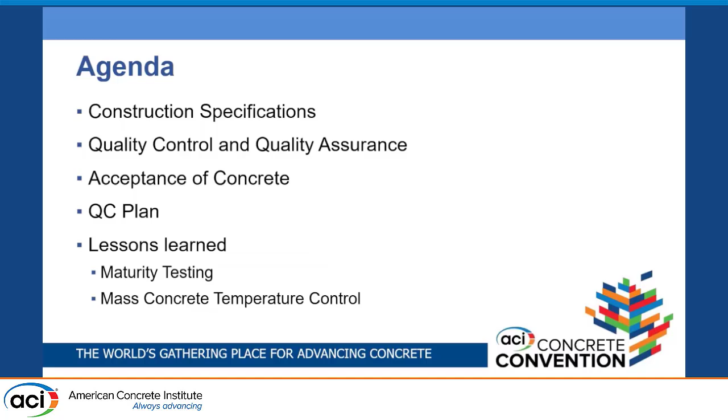Part of the subjects or issues are going to be construction specifications, quality control, quality assurance, acceptance of concrete, QC plans, and lessons learned on maturity testing and mass concrete temperature control.

Contract documents include the plans, technical specifications, the legal part, and those are made to ensure that the quality of the workmanship, control of the tolerance, and materials necessary to carry out and finish the work comply as specified and will be performed according to the designer's intention.

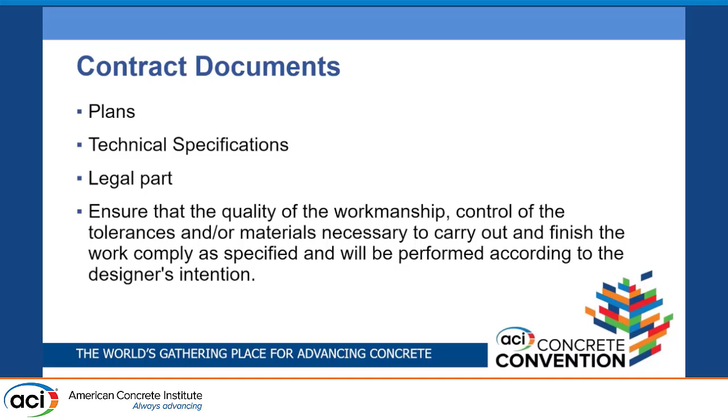Construction specifications should establish the acceptance parameters. They should be easy to understand. Something that Ramon always advised us is that if there is a specification that is not clear enough, just call out, make the call, make it clear before doing any activity.

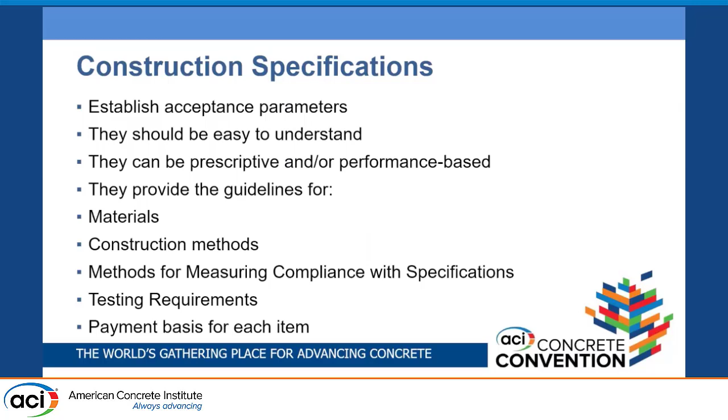They can be prescriptive or performance-based. They provide the guidelines for the materials that we're going to be using, construction methods, methods for measuring the compliance with the specifications, testing requirements, and finally, the payment for each of the items.

Quality and profit go hand-to-hand. The contractor may pay for the cost of a quality control system to provide an appropriate level of quality, or the contractor may pay for the lack of control through costs associated with poor quality in construction, including more repairs, patching unacceptable areas, removal and replacement of concrete works, time impact on the construction schedules, and high litigation costs.

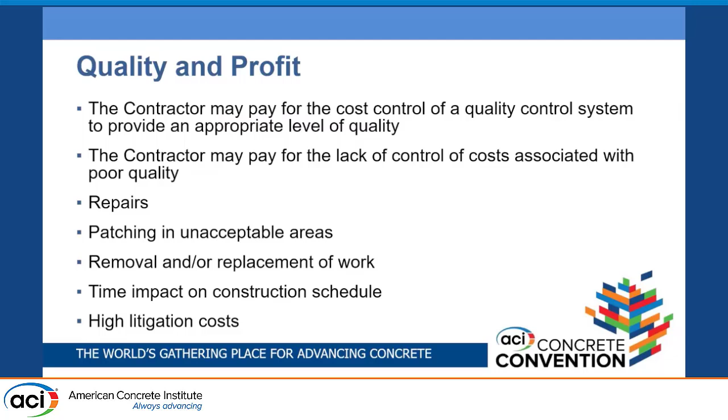This is something that I always use in my presentations, that we need to think quality. And quality is not only part of the quality control department of the contractor or the concrete producer. Quality control is a matter of everybody in the team of the construction: designer, inspectors, quality assurance, suppliers, producers, everybody. We should do it right the first time. We don't always get a second chance.

Pre-construction meetings with QC and QA teams should have representatives from QC and QA before construction begins. It's where we review all the project requirements, review the action or suspension limits for any activity, identify and clarify any mismatches or articles that are ambiguous on the drawing plans and specifications, and review the handling of test results that are non-compliant, as well as the chain of command for decision making.

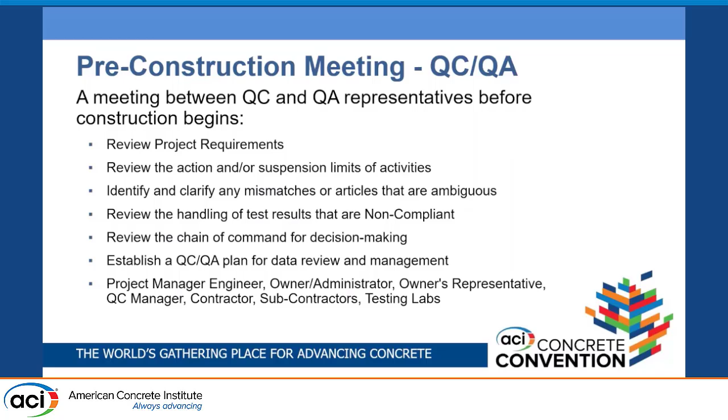Sometimes you can have a report that is not favorable for the contractor, but if there is no decision maker, then you can delay the project just because there was nobody to take the decision. Establish the QC and QA plan for data review and management of the project, and it should involve all the parties: the project manager, the engineers, the owner administrator, the owner's representative, QC managers, contractors, subcontractors, testing labs, suppliers, etc.

The cost of poor quality, what it means for the owner: loss of income, operational delays, reduction in the useful life of the structure. In 2018, I started working with a contractor at the airport in San Juan, Puerto Rico.

That's the taxi lane that connects both runways, doing the concrete pavement for the taxi lane November. At the time that I entered as a QC manager in that project, the contractor was very delayed with a lot of non-compliance because of the soil compaction, the P209, the subgrade, the P209, the CTB. We entered to try to put everything together, try to start again, and do it the right way.

What does poor quality mean for the contractor? Corrective actions that are sometimes very expensive, partial payments. I don't know if there is any contractor here today, but everybody wants to get paid 100%, not with discounts. Cost of claims, and at the end, liquidated damages.

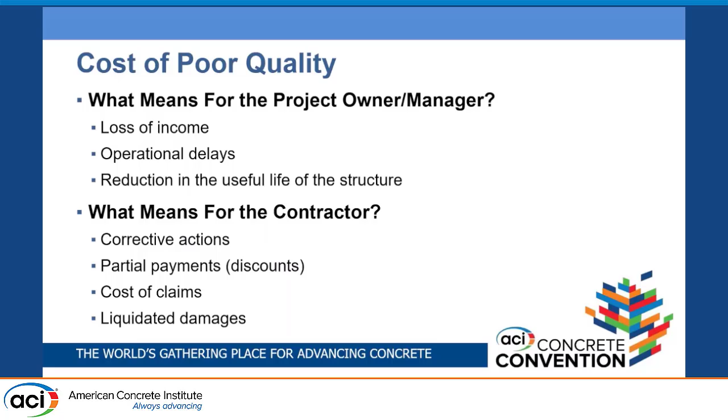In that project that I was on from 2018 through 2020, we ended up paying $1.5 million just in liquidated damages. And that was just because I was there. So I wasn't the owner of those liquidated damages, but I saw the certification, the final certification of those liquidated damages. I was there, so it is true.

What we should know before we place concrete: we should know tolerances, and we have those guides in ACI 117, where there are installation instructions for the reinforcing steel, the sizes, the position, quantity, according to shop drawings. Make quality control and quality assurance of those shop drawings so they are clear for everybody to work with.

What's going to be the cover for the concrete and the formwork design, the distance between the face of the exposed surface and the soil and the forms, depending on the structure exposure. What are going to be the soil conditions, the compaction, moisture barriers, etc.

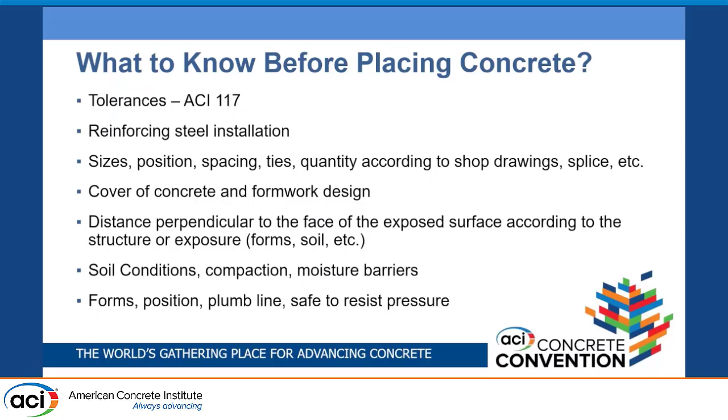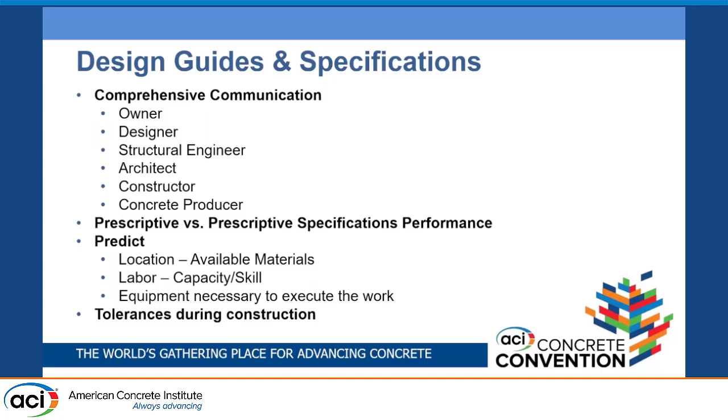On the guides for designing and specification, there should be comprehensive communication. Sometimes we lack communication. I think one of the things that we can have learned from Ramon is that we need to be very clear when we communicate, and we need to communicate with the whole team between owner, designer, structural engineer, architect, constructor, concrete producer.

Part of the concrete specifications, and this is very general, we can have guides from ACI 318, 301, 305, 311, ASTM C94, where in the specification we should have the compressive strength requirements, slump, workability that can be easy to adjust, easy to consolidate, and temperature.

In our case in Puerto Rico, we are classified as hot weather concrete. So the hydration of the cement and the condition of the temperatures and the admixtures that we use to delay the hydration, those retarders, are very, very important. Density or unit weight of the concrete, so we know we are inside the required yield. Air content for durability and workability, and the water-cement or water-cementitious ratios.

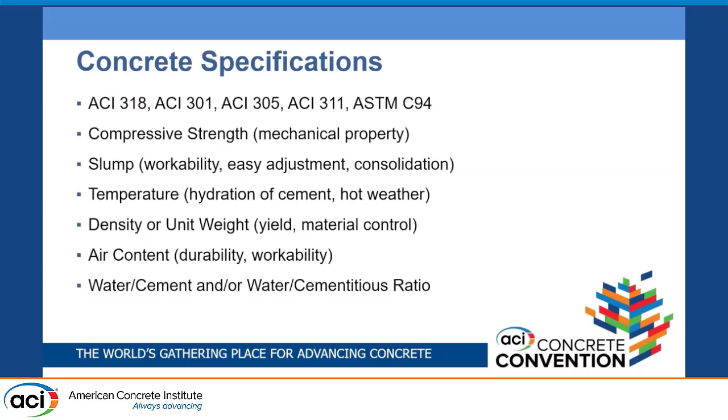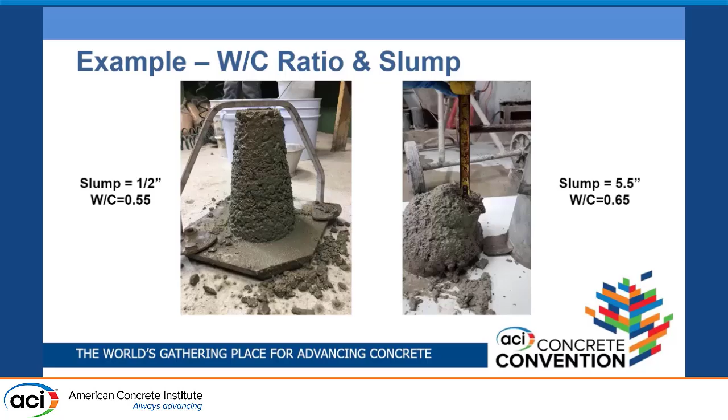We need to know what water-cement ratio we need, what kind of slump we have. Because sometimes we have specifications or drawing plans that request 3 inches of slump for a wall, but we know that in a wall that could be 6 inches thick, a concrete with a 3-inch slump is not going to be that easy to pour. So we need to manage that information, what kind of admixture we are going to use to make it more fluid to go inside the formwork.

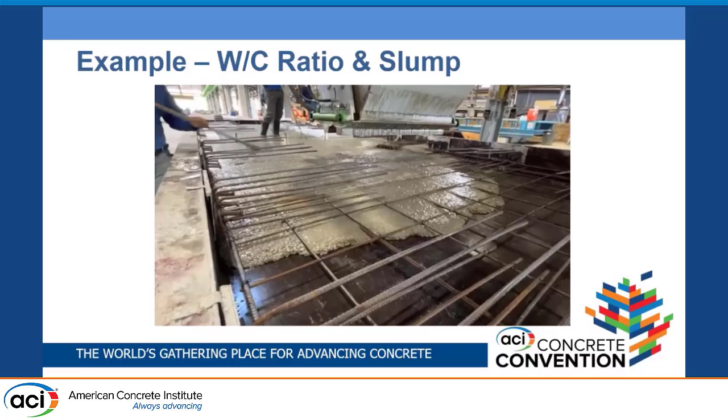This is a very good example of when you need more fluid concrete, but doing it, as Julissa said, not using water, using the right admixtures to make a better fluid concrete.

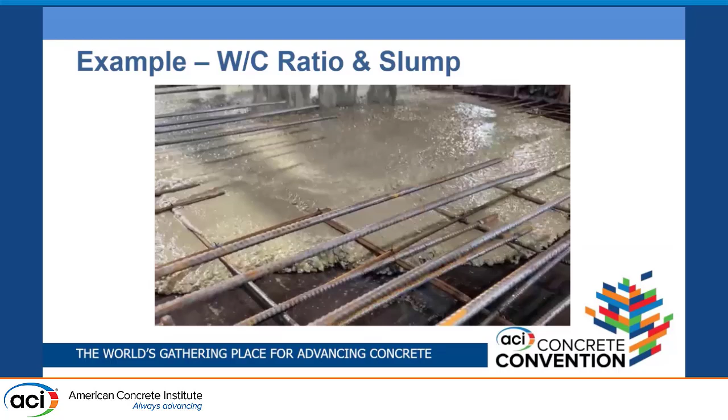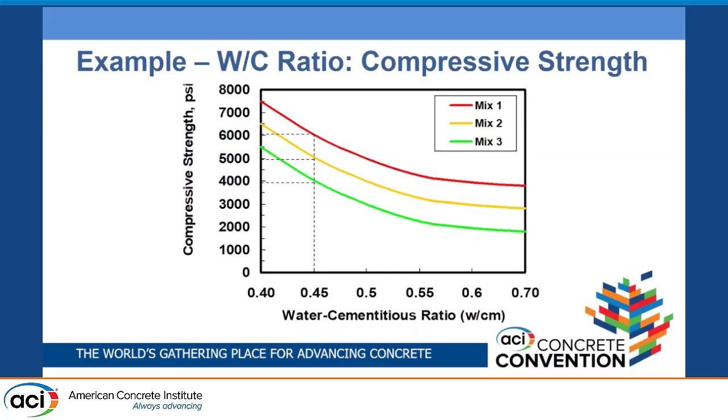If I have a water cement ratio requirement in my specification or drawing plans, I should know what to expect on the compressive strength. It's not the same as asking for a 0.45 water cement ratio and a 3,000 psi strength, because that doesn't match unless we add a lot of air or other cementitious material that can lower the compressive strength.

So we need to know how it affects durability too. In Puerto Rico, as an island, our resources are not like on the mainland, so we need to use what we have. In the past maybe 20 years, we had quarries with very good quality. Now we have to work with what we have right now.

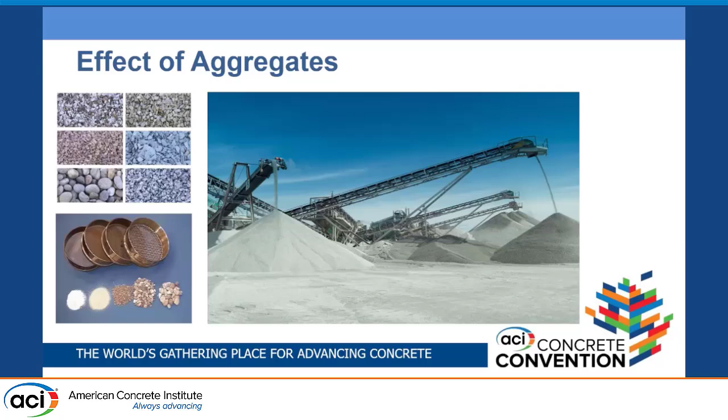It's not a matter of any sieve in the gradation being out of the limits. If it's consistent and it's always like that, you can work it out. Carrasquillo always teaches us how to optimize our mixes and how to work it even when one of the aggregates is out of the limits, how to mitigate those characteristics. So we've made a lot of use of different spreadsheets and optimization software to make it work.

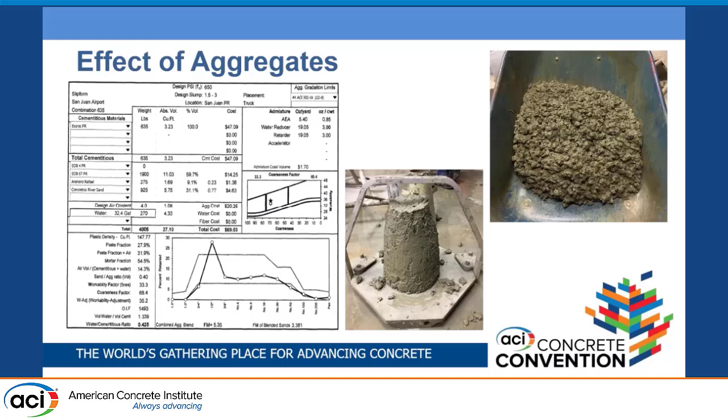Selection of your proportions depends on the structure you're going to be constructing. For example, if you're going to be paving with a slip-form paver, you're going to need a certain amount of coarse aggregate, and the size of that aggregate is very important.

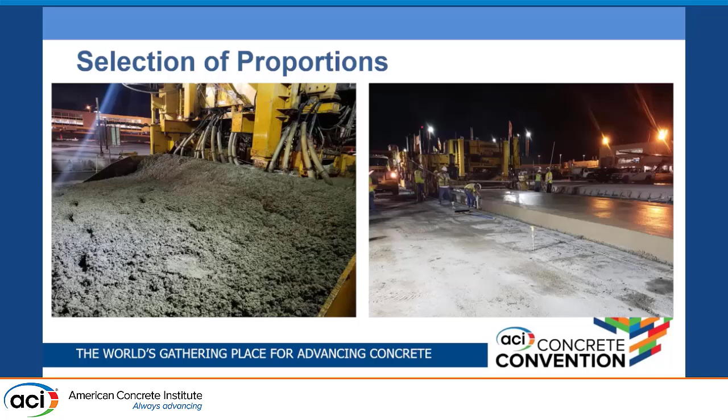But again, because of the resources we have in Puerto Rico, sometimes it's not going to fit those tolerances, those limits. So you have to work it out and start mixing different sizes until you get to the optimization.

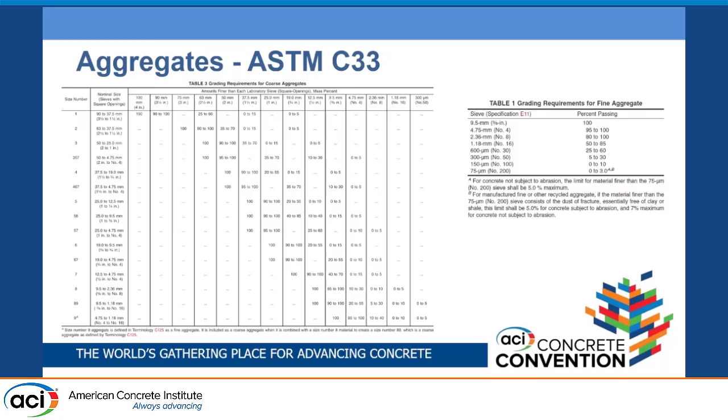Once you get to the job site, then it's the acceptance testing. Concrete sampling is just as important as the tests performed on it. Competent, educated, and certified staff is required to ensure that processes are done correctly. The technicians must understand the meaning of the results at the time of testing.

What is a slump out of tolerance? What is the concrete telling me? What is the unit weight telling me? It's not just a matter of reporting a number. What is it telling me — is it inside the tolerance or not? And if it is not in tolerance, why is it not, and make the proper adjustments.

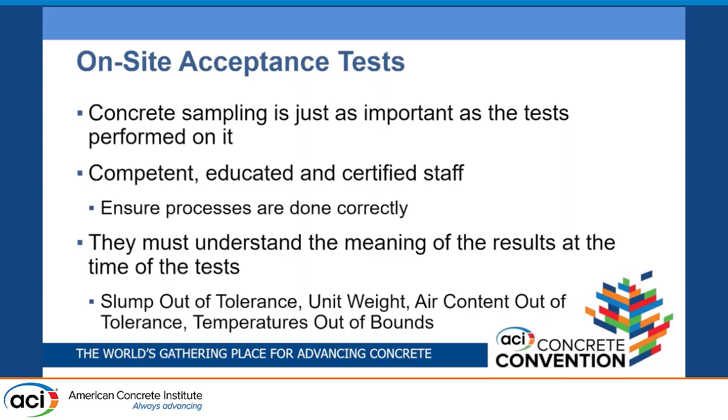Air content out of tolerance, temperatures out of tolerance. In Puerto Rico, with the Puerto Rican Concrete Association, we have the certification program from the ACI, and these are part of the 5 certifications that we can provide to the concrete industry.

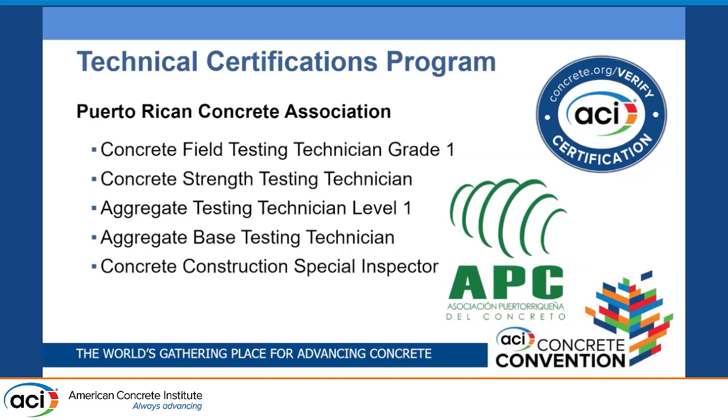With a quality control program that you can put into work at the job, you have to create a plan where each person knows their role. This is key, this is a key element. If everybody knows their role, once you are executing in the field, then everybody knows what to do.

The time for details, clarifying doubts, discussion of the rules of the game is days before the concrete placement operation. It's not at the time of placement. At the time of placement is go and execute, it's not to clarify anything. And the whole team should be on the same path. The day of the concrete placement is to execute in an acceptable way as planned.

Use of a concrete preplacement checklist — Ramon was always asking me to make a checklist. Remember, it's not only you; you have a team working with you, so everybody needs to know what they're going to be inspecting, what they're going to be checking.

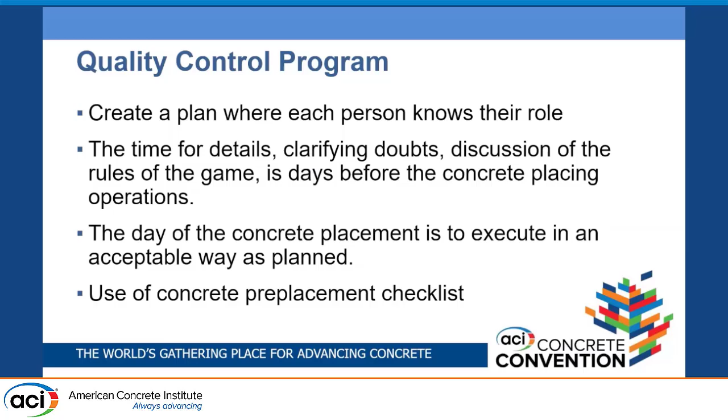At the airport, how many beams do you need for field testing? How many beams do you need for acceptance? How often should you test the slump, the temperature, the air content? At the concrete plant, how many technicians do you need just to check the concrete before it goes to the job site? So it's a matter of trying to mitigate and prepare before any activity.

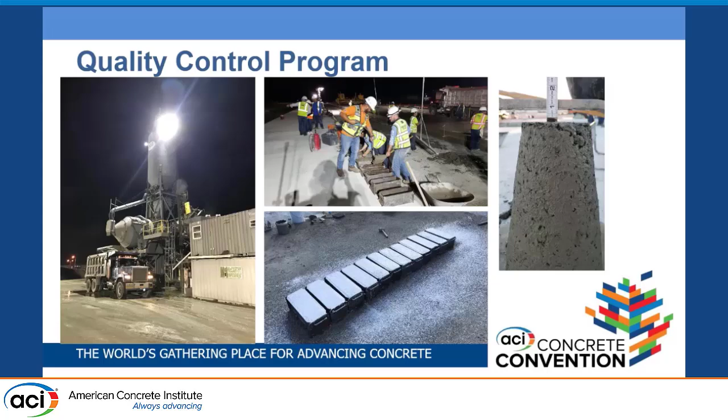Once you have your beams or test specimens, you need to manage how they're transported from the job site to the testing lab.

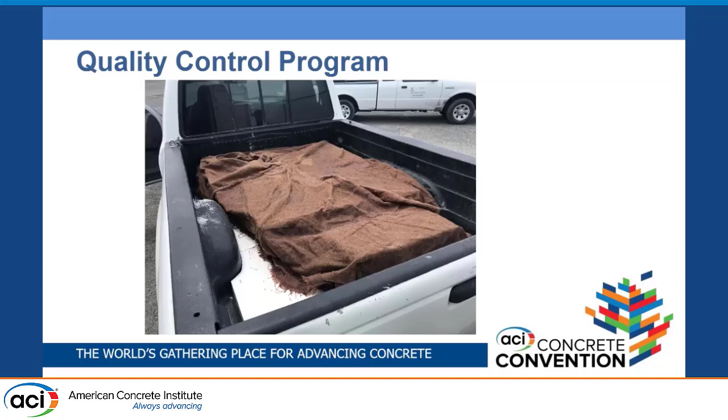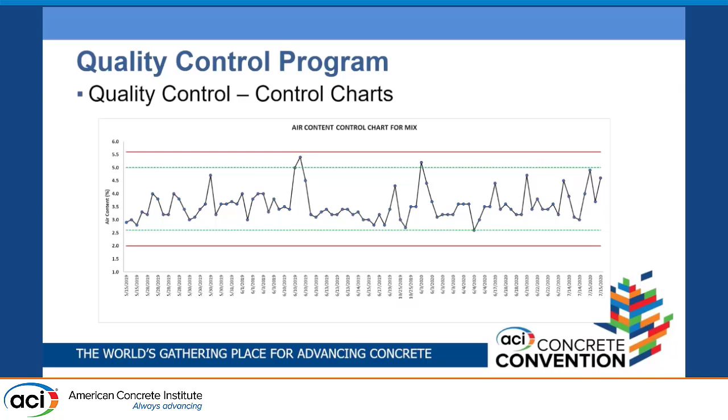Quality control charts — check on your information, have it on hand so everybody can see it easily. You don't have to know each of the parameters or the exact numbers; just by looking at the graph, you can see, hey, that's something out of tolerance, or that's closing in, or if it has a pattern going down, going up, whatever.

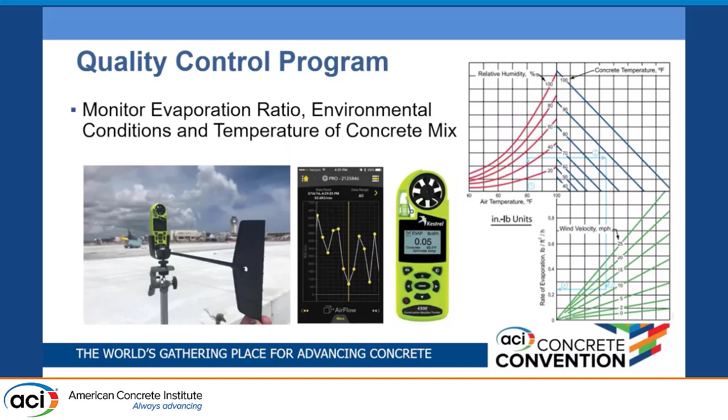As part of our quality control plan, for example at the airport, the evaporation ratio measurement is very important to check the concrete — when to start curing, when to cover the surface of the concrete — so you can prevent shrinkage cracking.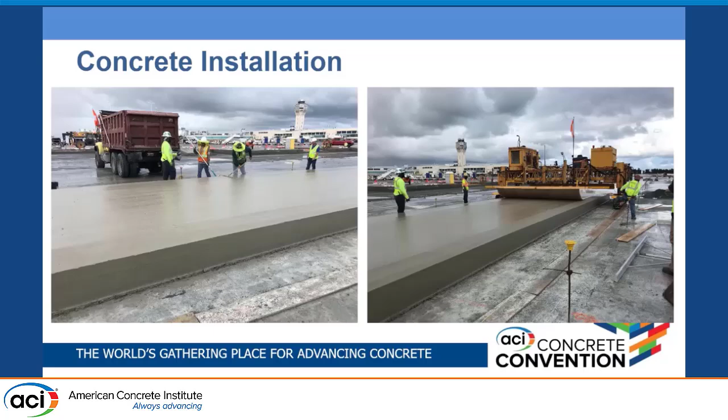What's going to be your equipment for concrete installation? What's going to be the equipment for texturing the exposed surface? And what's your curing plan, how you're going to cure your concrete, and make sure that curing plan is effective.

Sometimes you see this pavement that is almost white, but there are times the spray nozzles on the curing cart get clogged, and then you start seeing that it's not covering enough. If there is nobody looking at it, you're going to be paving 100 feet and not doing it the right way.

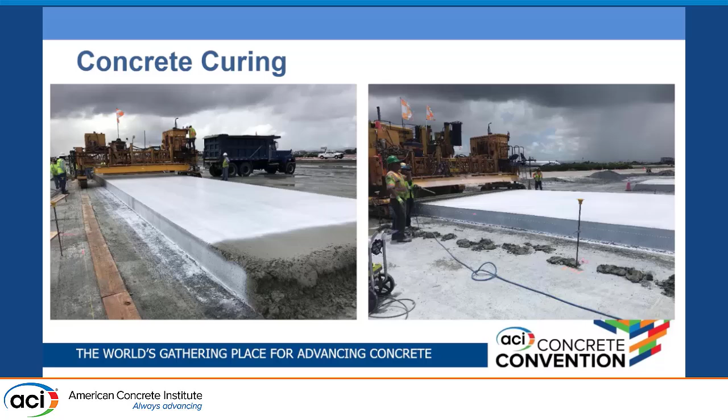But also, being on an island, we need to predict any rain events. During the night it's a little difficult, but we have smartphone applications that can advise when it's going to rain, so you can plan ahead. But there are times you cannot, so you have to be prepared with some plastic and cover your area.

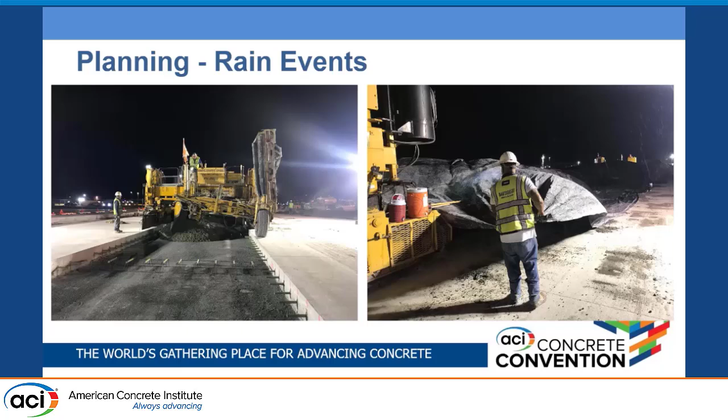After the rain event, just check. For example, in this one, I think we tore off the whole lane because it was very affected. But you need to plan ahead on things like that.

Now, from the lessons learned from Ramon Carrasquillo and from Fernando, who is here, some of the testing that I started working with from 2004, 2005 was maturity testing in Puerto Rico. There was a lot of presentations by Ramon talking about maturity testing, and there's a picture of a guy down with just the back and head visible. That's me, I'm the model.

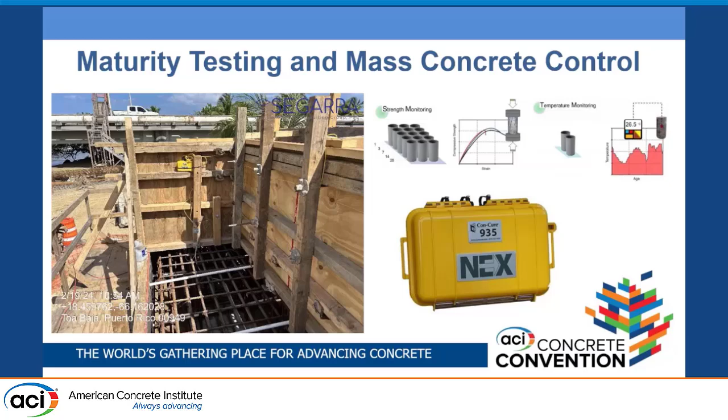I remember that every time I have any maturity question or something regarding maturity, I talk to Fernando, to Ramon, and we learn a lot about that.

This is a project of a wastewater treatment plant in the southeast of the island in Puerto Rico, where we have around 8 water tanks that are considered mass concrete. Segarra Engineering, my firm, is working on all the testing for the concrete and also the maturity and mass concrete control.

I remember when doing this, I talked to Oscar in San Francisco, and we'd check with Oscar and then check with Ramon. Ramon said, okay, check on ACI 207. What does it say? Well, yeah, I know, no, let's calculate it. And he took a pencil and paper, tun, tun, tun, tun, tun. These are going to be your temperatures. Well, those were our temperatures.

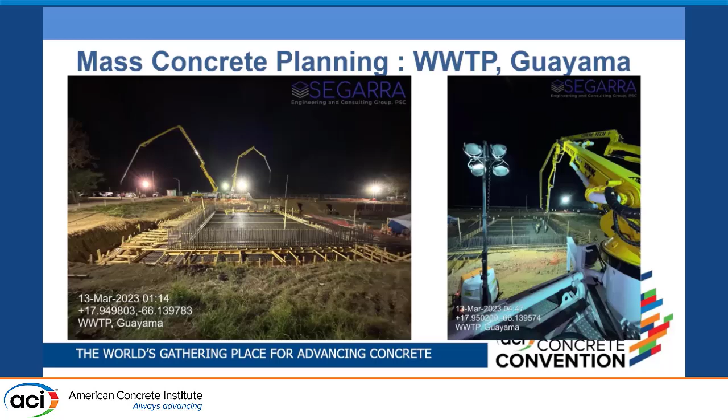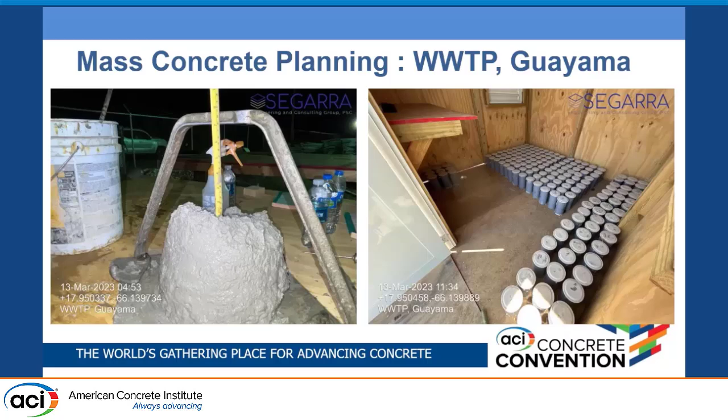We did a QC plan for the whole project. We stick to the plan, and also the QC plans on projects are not just a document, it's a live document. If you need to go back, update, recheck your plan, do it.

What's going to be the curing method for that mass concrete? In this case, we used white blankets, wet blankets, and foggers all around the structure for all the foundations. If you can see here on the charts, we were under the limits of the gradient between the centroid and the surface, and also under the limits of the maximum temperatures, using slag cement and very low cement content.

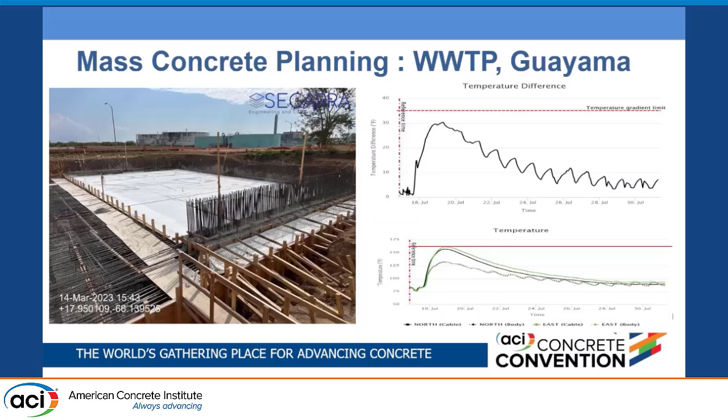And we achieved the maturity testing with our mixes. There was also another project, this was last year, where we placed two cap beams in Utuado, on the PR10, a road that is going to cross someday the whole island from north to south.

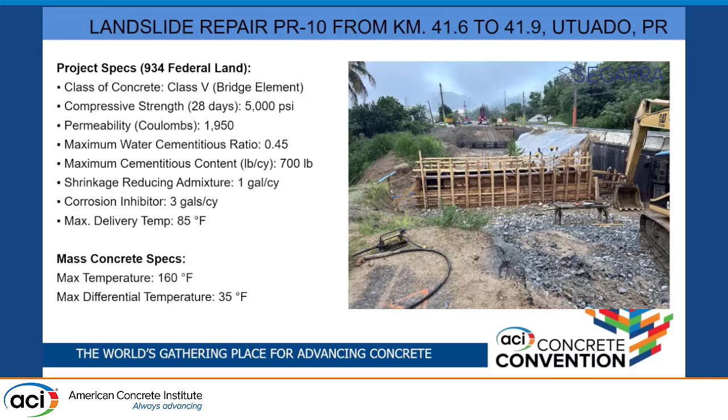On this one we were working with the specifications for 934 of Federal Lands from Federal Highway. We used a class 5 bridge element concrete class, compressive strength of 5,000 PSI, permeability per ASTM C1202 of 1950 coulombs, a maximum water cementitious ratio of 0.45, maximum cementitious content of 700 pounds, shrinkage reducing admixture 1 gallon per cubic yard, corrosion inhibitor 3 gallons per cubic yard, maximum delivery temperature of 85, maximum concrete temperature of 160, and maximum differential of 35.

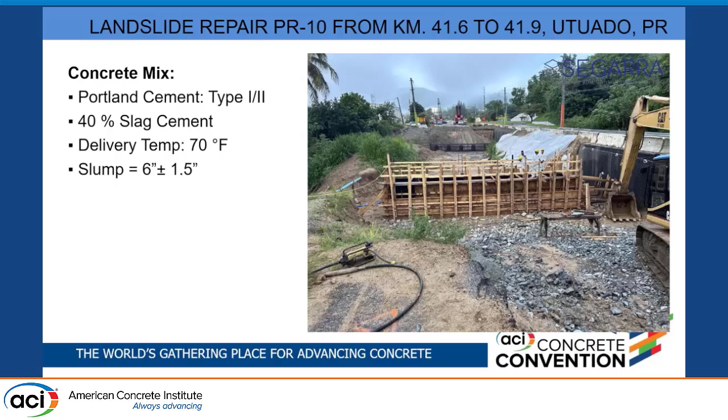What we planned with the concrete producer and the contractor was to use type 1-2 cement from Argos, 40% slag as a substitution. The delivered temperature was 70 degrees, using a lot of ice per cubic yard, and a slump in the range of 6 inches plus or minus 1.5.

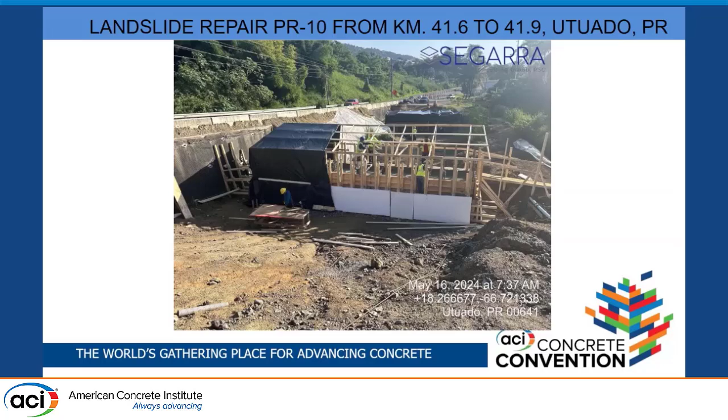As part of the mass concrete control, the contractor made like an invernadero, how do you say invernadero, a greenhouse, around the whole cap beam, and they put steam water inside of it. So they managed all the temperatures of the ambient and the structure, and these are some of the numbers we got on that project. Everything was as per the plan, and the contractor did everything in his power to meet the specifications, even though they did a lot of extra work around what they needed to do about the concrete.

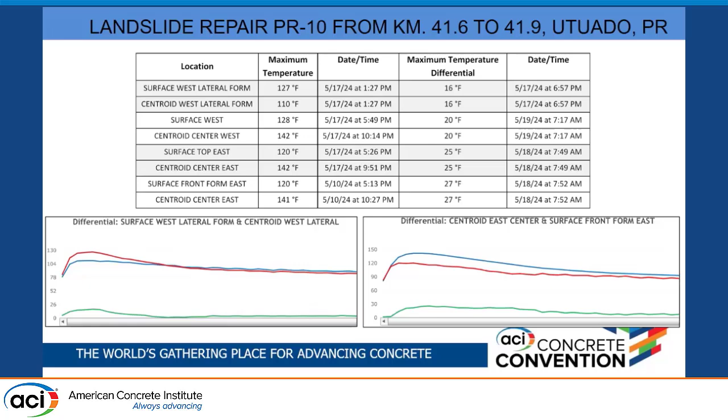And pretty much that's it. Thank you very much.